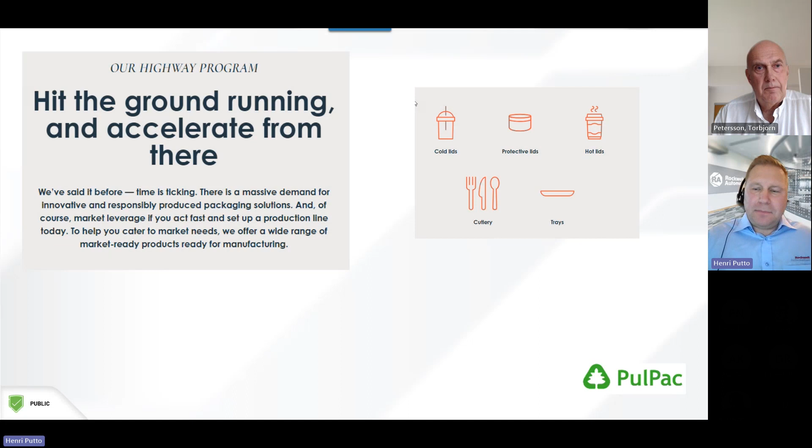This company is in a very nice scale-up procedure with a global approach to the market. It's very important for us as companies to help them have good, rigid technology and support them to be able to work remotely as well. The company is based in Gothenburg but works globally.

It is also very fast - the product could actually be used for much faster speeds in production. If you look at wet molding technology, it requires a lot of space, energy, and water, which is why this new technology is very exciting. PulPac is an IP company, so they sell the rights to use the technology and provide it into machines.

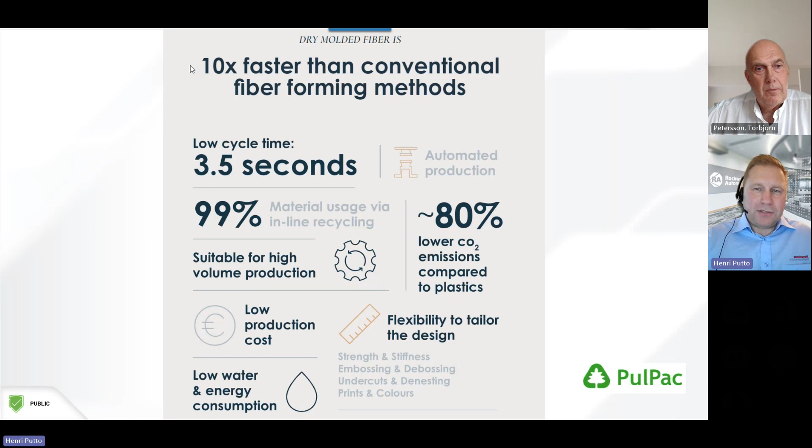And of course this makes sense - we have a market situation with a lot of demand, supply chain pressure, and a need to minimize downtime. We need to focus on carbon footprint and see what we can do to remove plastic from the sea. There are a lot of different aspects impacting customers today, and how can we, with very clever solutions, help reduce the impact from plastics.

With a strong system integrator partner, TechTribe, they are very keen also to work sustainably, and everyone has to do what they can for the sake of future generations. That is the TechTribe message, and partnering together with these very innovative companies is really an important part of our work. So what we are doing...

The prototypes that were built were based on CAD models connected together. So you see the digital thread here, starting from the CAD, moving to the automation.

You connect that automation to this dynamic digital twin, so it's possible to simulate, do what-if analysis, and optimize the line as much as possible.

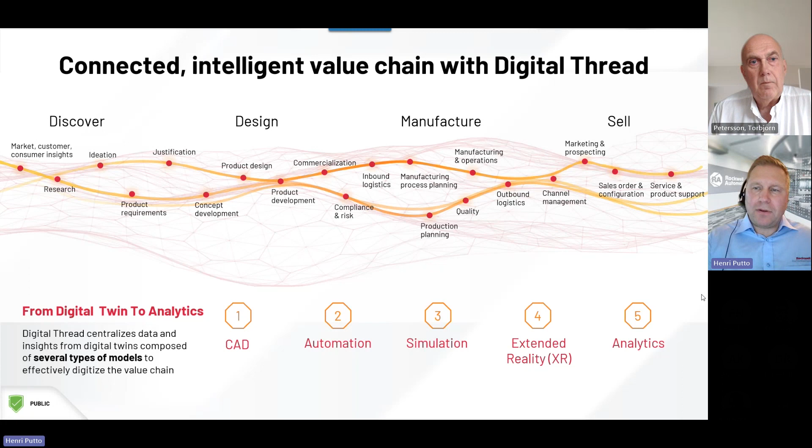Then, of course, there is a step to go as well into analytics and minimize use of chemicals, optimize production depending on what and where the machines are placed. So by connecting this digital thread, it is a very important part of the journey.

So if we move ahead, we had the analysis, looking into the most efficient way to produce machines, started to use demonstrators to get a common understanding of what the company will achieve, started to do simulations when you just have more like an animation-based workflow and product flows, and then start to go into the emulation part when you put the physics into play.

So that is really giving insights. Where is the kinematics giving some impact? Where is the friction not enough, and so on?

As the next step, we can also use these files with these emulated models, start to do the virtual commissioning part, and that is reducing the need of flights, need of transport, need of traveling. So that could be minimized at the most.

So in this journey with this customer, it was very convenient for the engineering teams to work with a digital twin, and then it's a good cover for the people who will take and start up the real machines, because there are backup functions all the time and they can access remotely to the real machine from the knowledge of the digital twin.

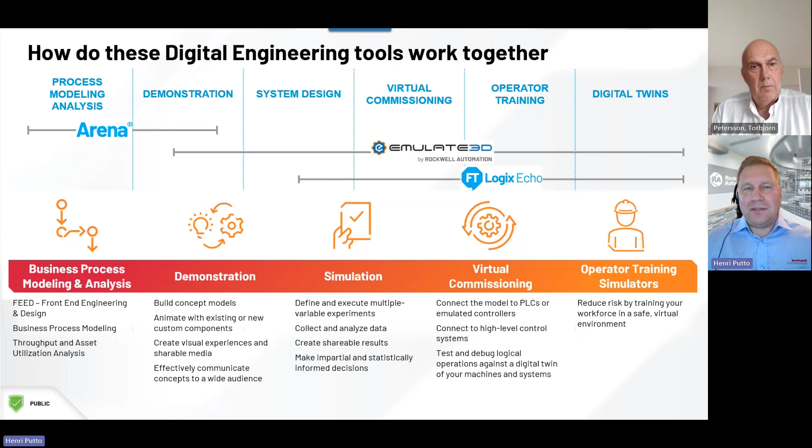And the next step is also to utilize all of these nice possibilities with operator training and operator simulations, to be able to have this kind of skills acceleration, be able to have job rotation in a good way, really help to do only mistakes in the model, so you are fully trained when you start to do the production.

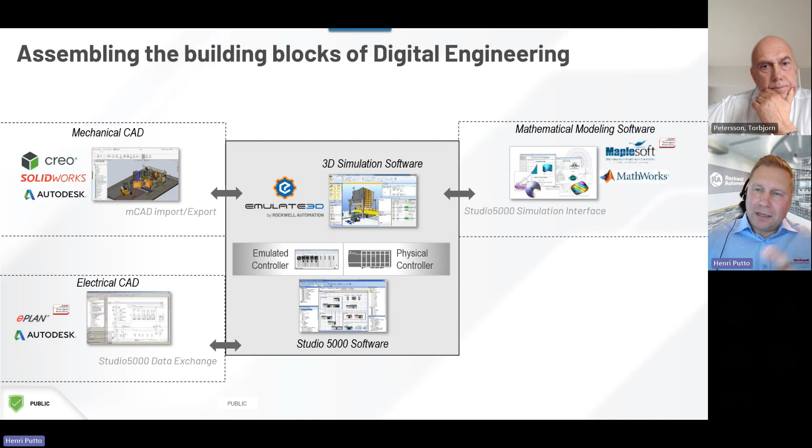So here is the connection. You can really tie together Creo mechanical CAD to Emulate 3D. It's fully supporting. You can use the electrical CAD drawings, import them to the system, so you don't need to redo the work, you only do the work once. You can use simulations from MATLAB, for example, to simulate some very specific topics in the model.

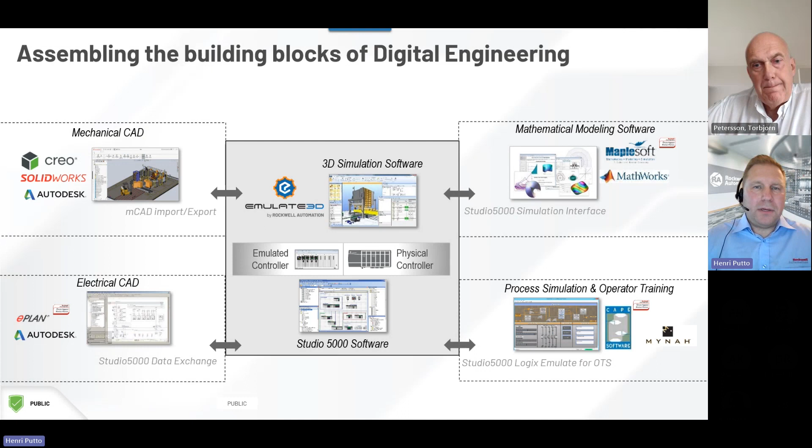And there are more ways to connect. It's fully supporting whatever will be the control system, whatever you want to simulate from. There are very good APIs and gateways to Emulate 3D to be able to work with a dynamic digital twin. And this is actually the stack we are working on.

Then, when you use these very optimized models, it's very easy to apply the automation on top of it. And afterwards, you connect assets, you connect IoT, so you're able to extend the digital thread and bring out the most of the capabilities.

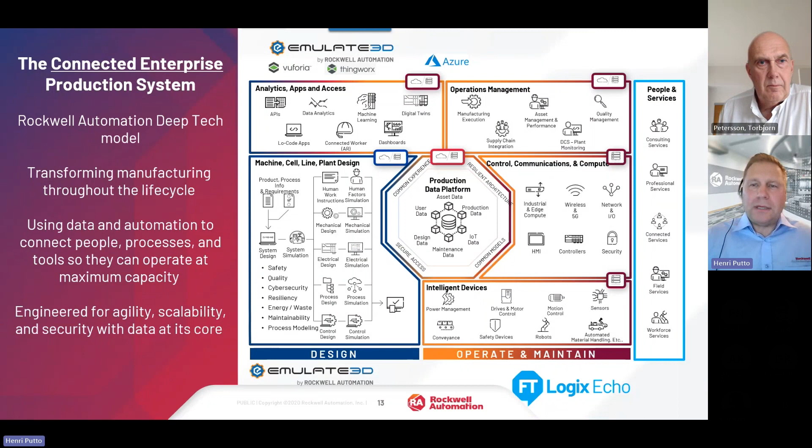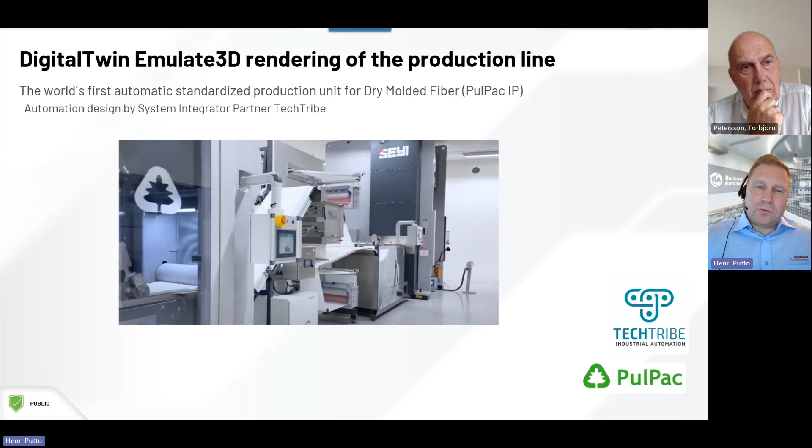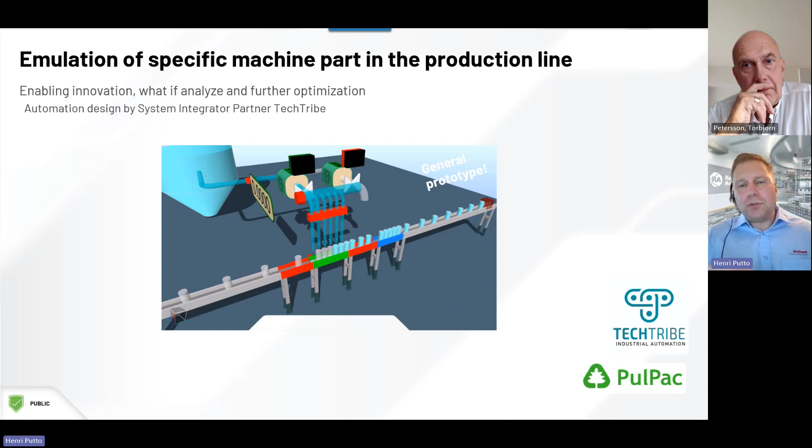Then when it's time to do some optimization, it is part by part. You can simulate and really understand what are the critical parts in the machine, what needs more focus, how can we connect people from different continents to have a common view of what needs to be done, how different parts in the production line support each other, and will the machine really fit in the production line.

So you can see also upstream, downstream, so the production line will be well connected. And this was a very important part to have the ability to really work remotely when you are a company that is in the scale-up phase. You need to support globally. This is tools that really make it happen.

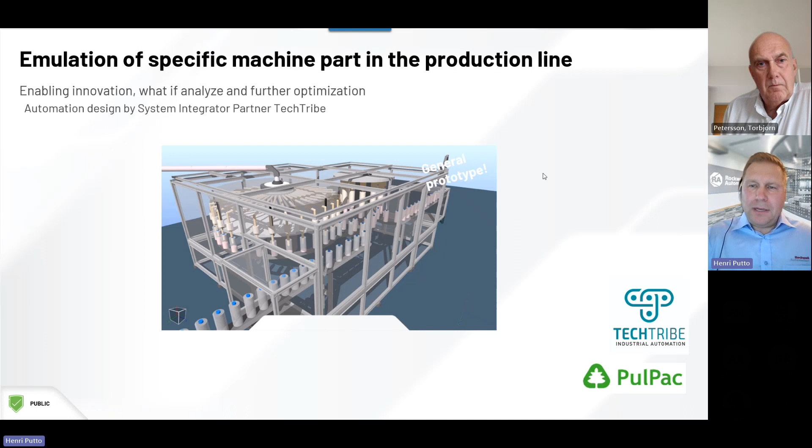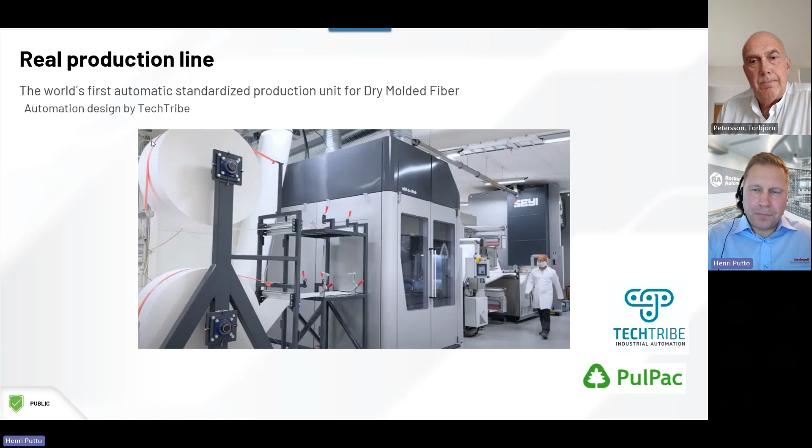So the next steps then, when the machine is built, by using this software it is very easy to see how this will fit together with the existing production lines.

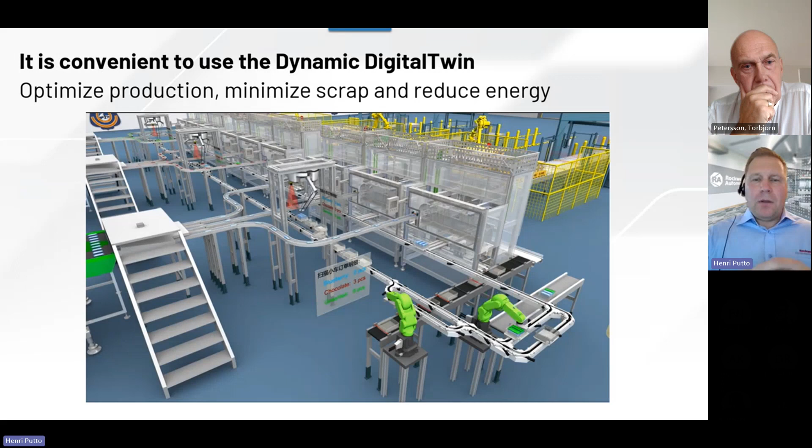Here you can have a very good overview of how the machines are working together, what kind of interactions will be between operators, between robots.

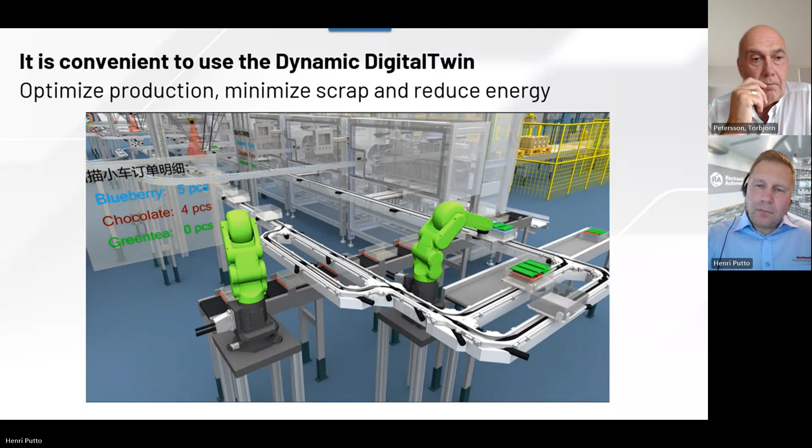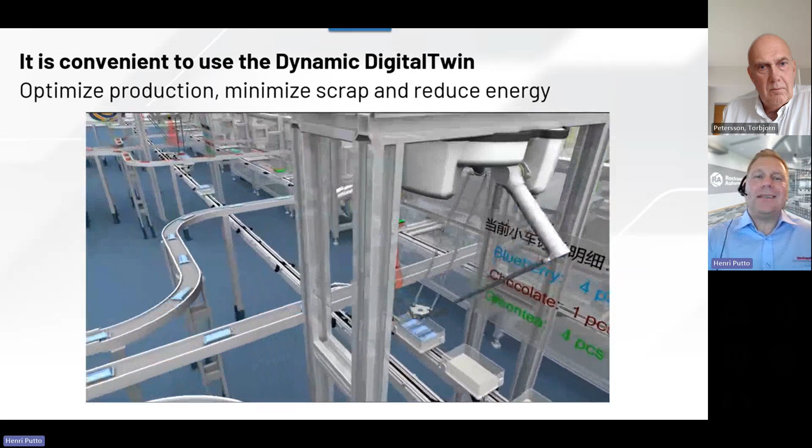You can easily work with the digital factory here and see, okay, we need to build another factory. Here we can reuse all of this content. We can put them into libraries and then very fast build the next factory. So it's a really good scale up capability. This is not exactly the same production line that PulPac is using, but this is a very good example of how it could look like.

And the coming steps then, we take what we have learned, we engage the workforce, we can do much more from home, from site, work together, invite the experts, increase operator effectiveness and safety, bring expertise anywhere with remote collaboration, emulate the process, and most important, minimize the scrap and unnecessary machine runtime to be able to really connect the workforce together. The next step in this digital engineering journey has already been started.

So that was the next step, to connect the machines with ThingWorx. So you have all the PLCs, you have the motors, you have the data from the PLCs, connect them together, and wrap them to be able to transform into performance benchmarking.

So you can see now here is the ability to connect the different factories together, different production lines, using ThingWorx for the OEE, to have and bring good insights for the guys who are running the production and need guidance.

And we make use of that in the modern car today. You have so much information and insights that really help you to be a better driver. So that is really the topic here, to help the machine builders have the dashboard, to get the insight, to be able to take a good decision.

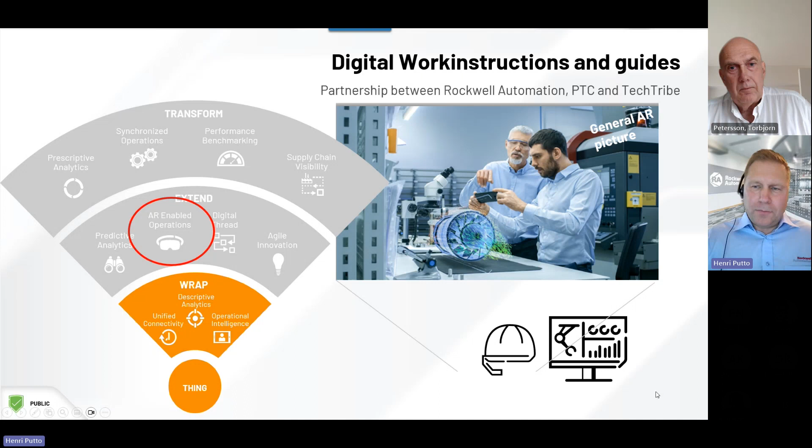So let's see. By enabling the power of technology it is of course very exciting, but we reduce the impact on the planet, reduction of travel needs, track standby consumption of assets, so you can really see that there are no unnecessary movements. If there are breaks, something like that, you take down all of the consumers. Enabling insights also from the production for further optimization of operations.

So this is absolutely supporting the journey to a more sustainable production.